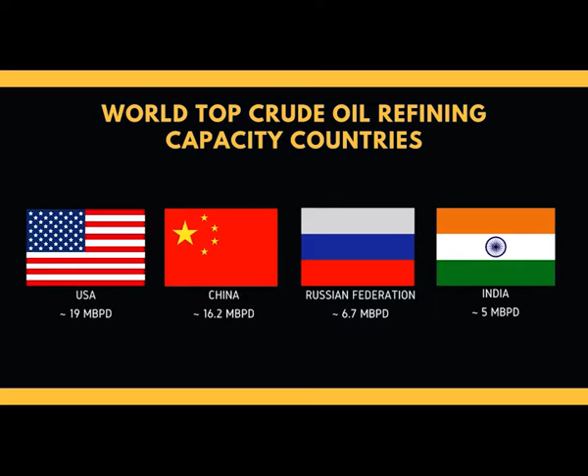So, in terms of crude oil refining capacity, India is in the 4th position, after USA, China and the Russian Federation. In USA, the capacity of refining is around 19 million barrels per day, while in China it is 16.2 million barrels per day. The Russian Federation processes 6.7 million barrels per day. In India, it is approximately 5 million barrels per day. So, that is where we rank in the refining capacity amongst the other countries.

Now, let us try to understand the history and evolution of petroleum refining in India. So, way back in the last part of the 19th century, oil was struck in Assam, and immediately the decision makers tried to set up a refinery in the nearby locality. So, the very first refinery in India was set up at Digboi, in Assam. Digboi refinery is known as the birthplace of the oil industry in India. So, that is where our oil and gas industry's history started.

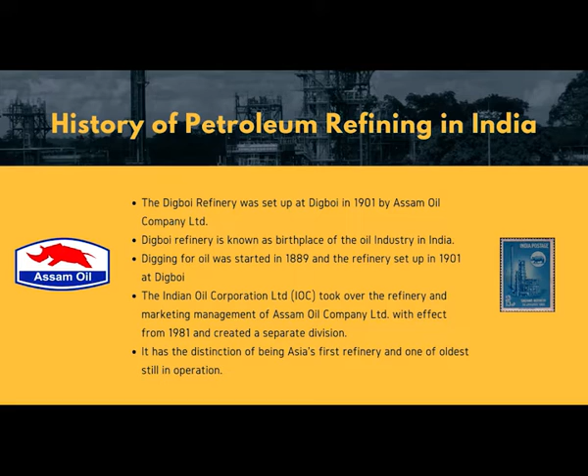Digging for oil started in 1889, and the refinery was set up almost in 1901. The Indian Oil Corporation took over this refinery, and it was known as Assam Oil Division, and finally it became part of Indian Oil Corporation. So, this refinery has the distinction of Asia's first refinery and one of the oldest still in operation. Even after 120 years, this refinery is running, and this is the unique distinction of the refinery at Digboi.

So, after Digboi refinery, for almost 53 years, there were no refineries constructed in our country. So, way back in 1954, Stanvac, a multinational company which was later known as ESSO, commissioned a 1.2 million metric tons per annum refinery at Trombay in Maharashtra. In 1955, Burma Shell commissioned its 1.7 million metric ton refinery in the same location, that is Trombay in Maharashtra.

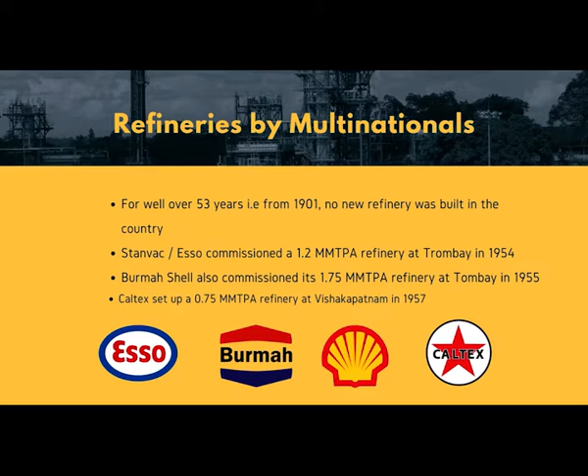On the other side, on the eastern coast, in the city of Visakhapatnam, Caltex set up a 0.75 million metric tons refinery in 1957. So, this is how multinationals started the refining industry after 1901, after a gap of 53 years. Later, due to several policy decisions, these multinational companies were taken over by Government of India.

In 1974, Hindustan Petroleum Corporation Limited, in short HPCL, came into being after the takeover and merger of erstwhile Esso Standard and Lube India Limited. Caltex Oil Refining India Limited, which was known as CORIL, was taken over by the Government of India in 1976 and subsequently merged with HPCL in 1977.

In 1976, Bharat Refineries Limited acquired complete ownership of Burma Shell's interest in India, including the largest refinery and the nationwide marketing organization. Bharat Refineries Limited was later named Bharat Petroleum Corporation Limited or BPCL. So, this is how these two major Indian petroleum organizations, namely HPCL and BPCL, emerged.

So, if you see the refinery organization in India, primarily there are 23 refineries which are managed by organizations such as Indian Oil Corporation Limited IOCL, Hindustan Petroleum Corporation Limited HPCL, Bharat Petroleum Corporation Limited BPCL, and ONGC, Oil and Natural Gas Corporation. All these are public sector undertakings. In the private sector, the refineries are managed by Reliance Industries Limited and Nayara Energy.

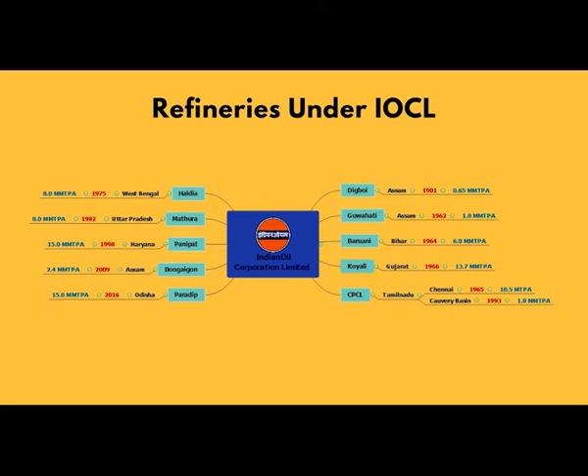Now let's try to understand the different kinds of refineries which are part of Indian Oil Corporation Limited. As I said earlier, Digboi refinery is the very first refinery, which was started in the state of Assam in 1901. This is the oldest refinery in the world which is running smoothly. And this is also called the Gangotri of the Indian hydrocarbon sector. Earlier it was owned and operated by Assam Oil Company Limited, which was a Burmah Oil company, and finally it came into the fold of Indian Oil Corporation Limited and known as Assam Oil Division. Now it is very much part of Indian Oil Corporation. So this is the oldest refinery in our country.

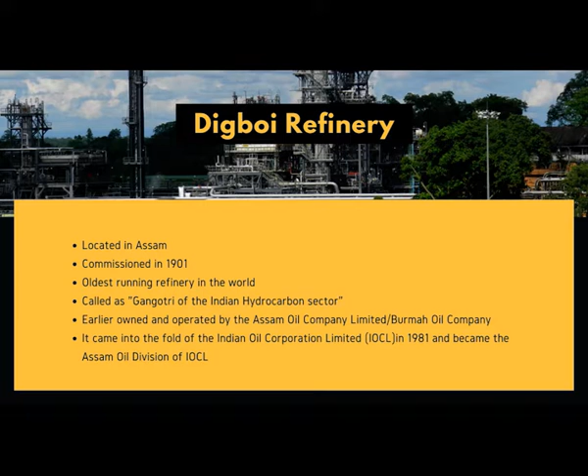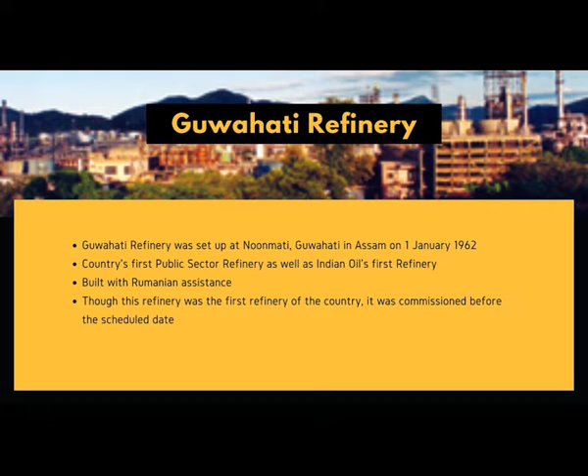The second refinery of Indian Oil Corporation is the Guwahati refinery. Guwahati refinery is also located in the state of Assam, and this was commissioned on Jan 1st, 1962. It is the country's first public sector refinery as well as Indian Oil's first refinery. So this refinery was constructed with the help of Romanian engineers. The Romanians traveled to India and they helped to construct the refinery, and of course our Indian engineers also got trained in Romania for constructing this refinery. Though the refinery was the very first refinery in our country, it was commissioned well before the scheduled date. So that's how the very first refinery has got its own distinction.

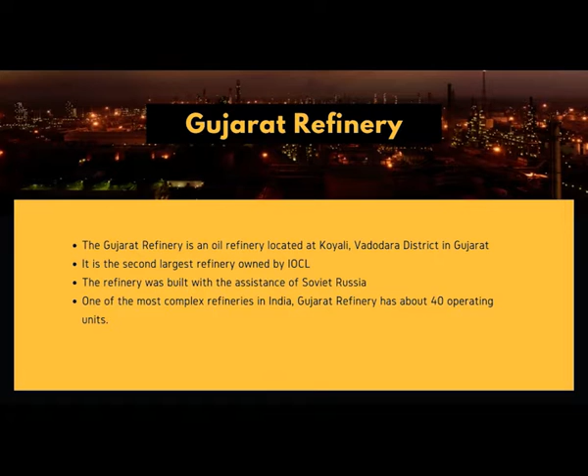Then we move on to Gujarat refinery, which is also known as Koyali refinery. So this refinery is located at Koyali, Vadodara district of Gujarat. This is the second largest refinery owned by Indian Oil Corporation Limited. The refinery was built with the assistance of Soviet Russia and is one of the most complex refineries in India. Gujarat refinery had around 40 different operating units, and this was the very first refinery to have hydrocracker technology. Hydrocracker technology is supposed to be one of the complex technologies, and Gujarat refinery was the very first to adopt this technology in the Indian refinery scenario.

Then the next refinery is Haldia refinery. Haldia refinery is located in West Bengal. This is the fourth refinery of Indian Oil Corporation Limited. It is one of the two refineries of Indian Oil Corporation Limited producing lube oil base stocks. Normally, refineries are classified as a fuel refinery or a lube refinery. All refineries cannot produce lube oil. Very few refineries would be designed and constructed in a manner so that lube oil can be produced. This is one such refinery which can produce lube base stocks. The fuel sector of the refinery was built with French collaboration, while the lube sector was constructed with the help of Romanian collaboration.

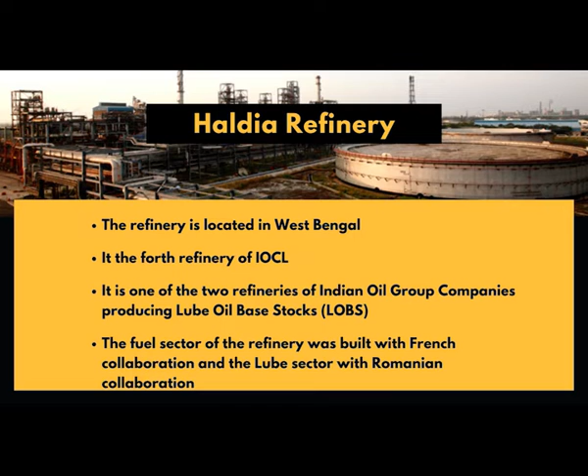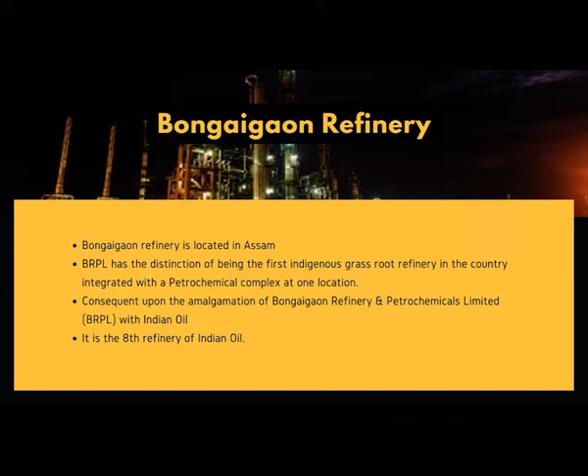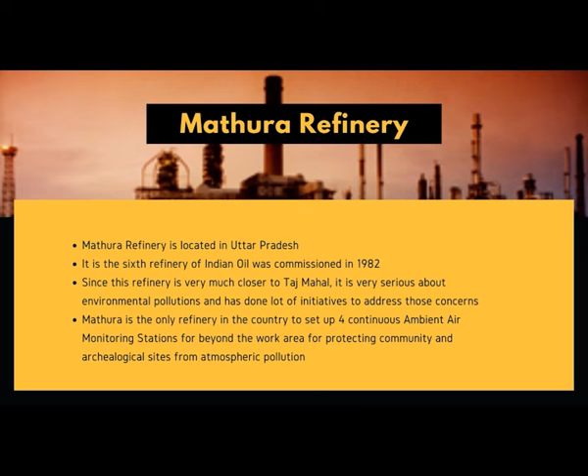Then comes the Mathura refinery. Mathura refinery is located in Uttar Pradesh, very close to the monumental heritage structure Taj Mahal. It is the 6th refinery of Indian Oil, commissioned in 1982. Since the refinery is very close to the Taj Mahal, it is very serious about environmental pollution and has done a lot of initiatives to address the concerns related to environmental pollution. Mathura refinery is the only refinery in the country to set up 4 continuous ambient air monitoring stations far beyond the work area for protecting the community and archaeological sites from atmospheric pollution. This is one refinery where a lot of new technologies have been brought in for the first time.

Then comes the Panipat refinery. Panipat refinery is located in the state of Haryana. It was set up in the year 1998.

Panipat refinery is the 7th refinery belonging to Indian Oil Corporation Limited. Then Paradip refinery. Paradip refinery is the 11th refinery being set up by Indian Oil Corporation in the state of Odisha. Now we move on to Chennai Petroleum Corporation Limited.

Chennai Petroleum Corporation was erstwhile known as Madras Refineries Limited, MRL, which was a standalone refinery some time back, and later it was acquired by Indian Oil Corporation Limited. Madras Refineries, or Chennai Petroleum Corporation Limited, was formed as a joint venture in 1965 between the Government of India, Amoco, an American oil company, and the National Iranian Oil Company, NIOC.

CPCL today has got 2 locations. One location is in Manali, Chennai, where it has got 3 refineries, and CPCL has also got a mini refinery at Nagapattinam. Chennai Petroleum Corporation was the pioneer in implementing a lot of new age technologies.

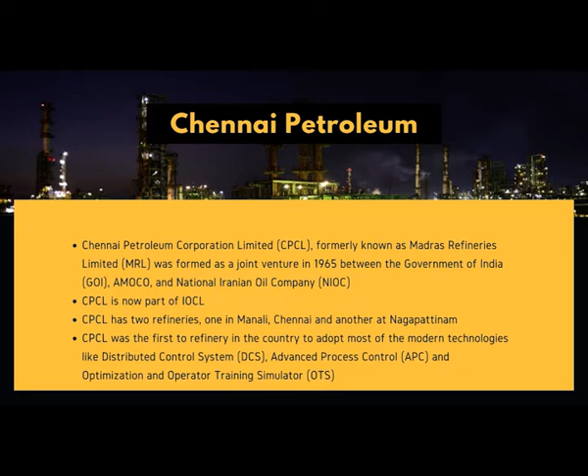It was the very first refinery to adopt a distributed control system, that is the microprocessor based control room, then advanced process control and optimization, as well as an operator training simulator. So that is how Chennai Petroleum Corporation has got the unique distinction of being the forerunner in adopting new technologies. Now we move on to Bharat Petroleum Corporation Limited, which is known as BPCL.

BPCL has got 4 refineries, one in Mumbai, one in Kochi, the third one is in Bina in Madhya Pradesh, and finally Numaligarh in Assam. The Mumbai refinery came on stream in 1955 under the ownership of Burma Shell Refineries Limited.

Following the government's policy of acquiring the multinational companies, Burma Shell was taken over by the Government of India and it was renamed as Bharat Refineries Limited in 1976. In 1977, the company was given its permanent name Bharat Petroleum Corporation Limited.

Bharat Petroleum Corporation has got presence in the entire downstream, that is refining as well as the marketing of petroleum products. Mumbai refinery has processed 93 different types of crude oil in the 5 decades of its operations, making it one of the most flexible refineries in the country. The next refinery that is part of Bharat Petroleum Corporation is the Kochi refinery.

Kochi refinery was earlier known as Cochin Refineries Limited, and Cochin Refineries Limited was established as a joint venture in collaboration with Phillips Petroleum Corporation, which was an American company, and the Government of India. It was later acquired by Bharat Petroleum Corporation in 2006. Now Cochin Refineries is known as Kochi Refinery.

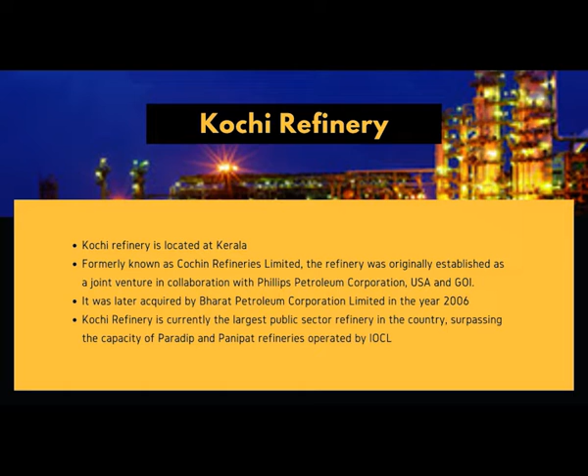Kochi Refinery is currently the largest public sector refinery in the country, surpassing the capacity of Paradip and Panipat refineries of Indian Oil Corporation Limited. Then we move on. This refinery, Bharat Oman Refinery, is a joint venture refinery. Bharat Oman Refinery is located in a place known as Bina in Madhya Pradesh. It was founded in the year 2011.

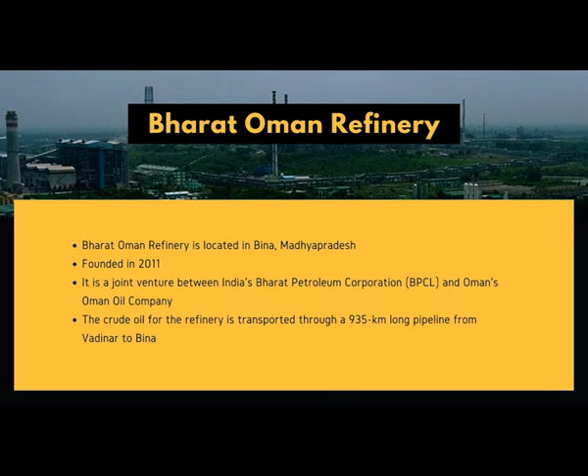It is a joint venture between India's Bharat Petroleum Corporation (BPCL) and Oman's Oman Oil Company. The crude oil for the refinery is transported through a 935 km long pipeline from Vadinar in Gujarat to Bina in Madhya Pradesh. The fourth refinery, which is part of BPCL, is known as Numaligarh Refinery. This is located in Numaligarh in Assam.

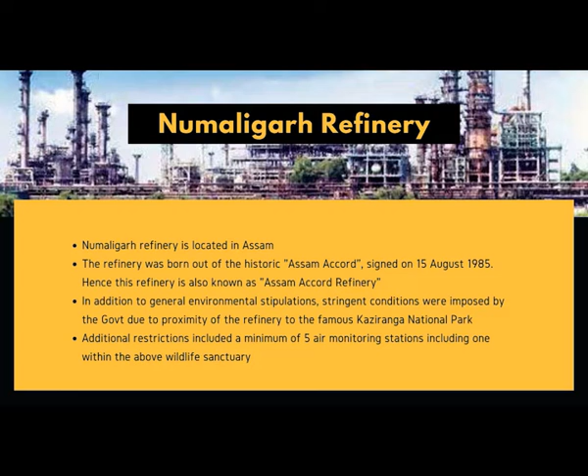The refinery was born out of the historic Assam Accord signed in 1985. Hence, this refinery is also known as the Assam Accord Refinery. This refinery is located close to the Kaziranga National Park. In addition to the general environmental stipulations, stringent conditions were imposed by the government due to the proximity of the refinery to the famous Kaziranga National Park.

So this refinery has paid enough attention to take care of the environmental aspects. Additional restrictions included a minimum of 5 air monitoring stations, including one within the wildlife sanctuary. Now let's move on to discuss the refineries under the umbrella of HPCL, that is Hindustan Petroleum Corporation Limited.

HPCL has got 3 refineries, one in Mumbai, the next one is in Visakhapatnam, the third one is Bathinda. Mumbai refinery, as we discussed earlier, was a refinery that was taken over from a multinational organization by the Government of India. This is located in Mumbai, Maharashtra.

This Mumbai refinery was commissioned by Standard Oil (SO) in 1954. In 1974, the Government of India took over the operation of SO in India and created Hindustan Petroleum Corporation Limited as a public sector enterprise.

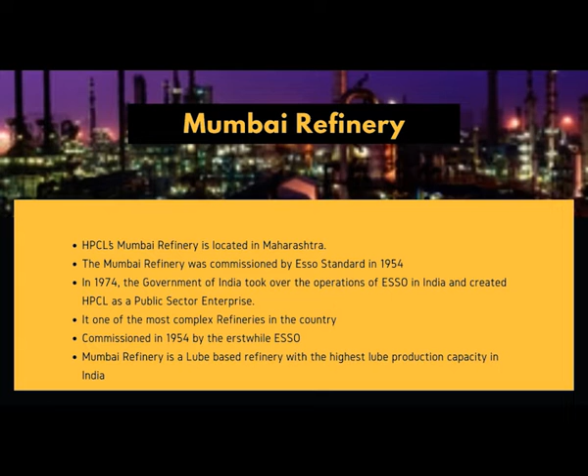It is one of the most complex refineries in the country. So this Mumbai refinery of HPCL is one of the lube-based refineries with the highest lube production capacity in India. The second refinery under the umbrella of HPCL is the Vizag refinery.

The Visakhapatnam refinery was commissioned in 1956 as Caltex Oil Refining India Limited, CORIL, in Andhra Pradesh. This was the first refinery on the east coast of India and the first major industry in Visakhapatnam. Finally, in 1978, CORIL was taken over by the Government of India, and finally this refinery was merged under HPCL.

The third refinery under the umbrella of HPCL is the HMEL Bathinda refinery. This is a refinery located in Punjab. It is actually a joint venture refinery, a joint venture between HPCL Limited and Mittal Energy Investments Limited. This refinery became operational in the year 2012. This refinery is also known as Guru Gobind Singh Refinery, GGSR.

Now we are going to discuss the refineries under ONGC, Oil and Natural Gas Corporation Limited. As many of you know, ONGC is an upstream company that is primarily into exploration and production. Later, ONGC also started focusing on the downstream, and right now it is in the refining business. Let's try to understand the refineries under ONGC.

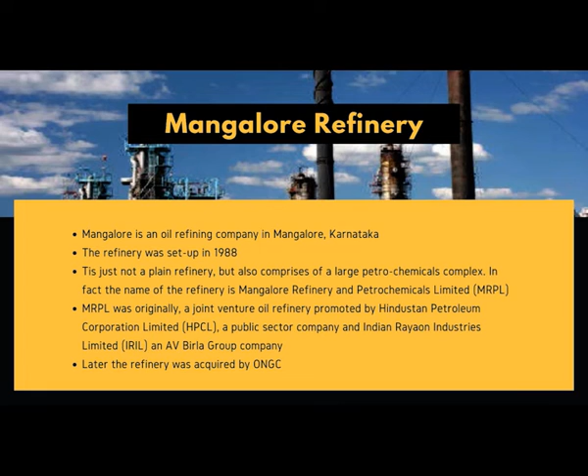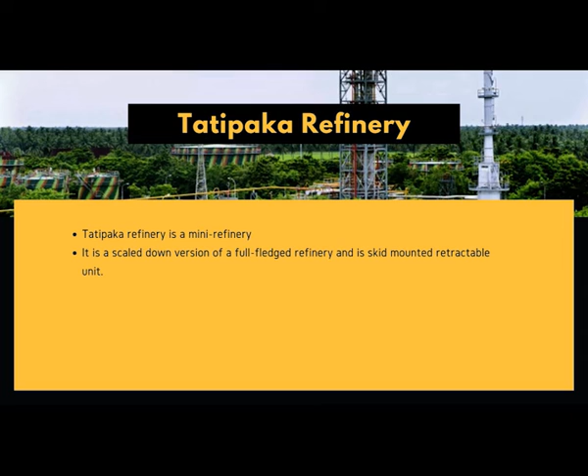Now the refineries we have so far discussed were part of public sector undertakings where the Government of India was the major stakeholder. Now we move on to discuss the refineries under the private sector. So when we talk about the private sector's presence in the refining business, the first group that comes into the picture is Reliance Industries Limited. So Reliance has got presence in the oil and gas business. Earlier they were into the petrochemical business. So as a strategy of backward integration, they tried to get into the refining business, and because of this reason, now they own 2 refineries in Jamnagar.

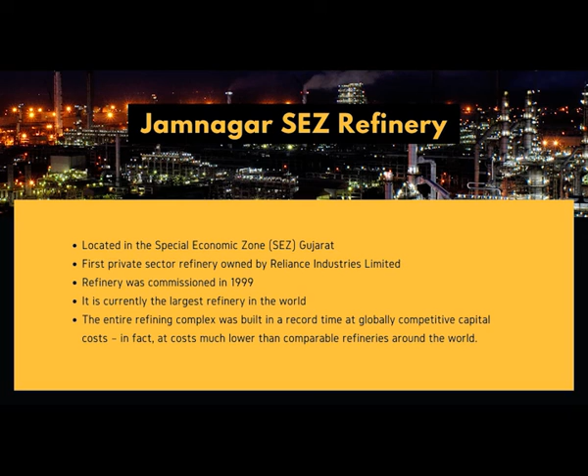So the first refinery is located in the Special Economic Zone, Jamnagar, Gujarat. The first private sector refinery owned by Reliance Industries Limited. This was commissioned in 1999. It is the largest refinery complex in the world. The entire refinery complex was built in record time at a globally competitive capital cost. In fact, at a cost much lower than comparable refineries around the world. And this refinery is also one of the most complex refineries in the world.

Then the next private sector refinery is part of Nayara Energy. Let's try to understand more about Nayara Energy. Nayara Energy's refinery is located in Vadinar in Gujarat. Earlier this refinery was part of Essar Oil Limited. Currently it was taken over by multinationals. Currently the major stakeholders are Rosneft, a Russian energy company, and Trafigura, a Singaporean trading company.

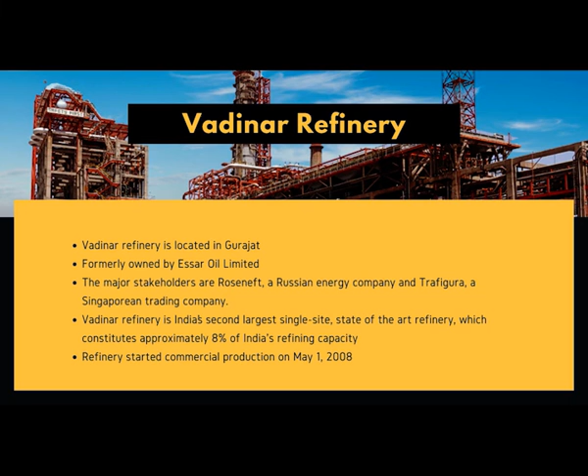Vadinar refinery is India's second largest single site state-of-the-art refinery, which constitutes approximately 8% of India's refining capacity. And this refinery started producing petroleum products in the year 2008. India's refining capacity has increased to 248.9 million metric tons at present, comprising 23 refineries: 18 under public sector, 3 under private sector, and 2 in joint sector. The capacity utilization of the refineries in India was 106.6% in 2016-17. Now it has increased to 107.7% in the year 2017-18.

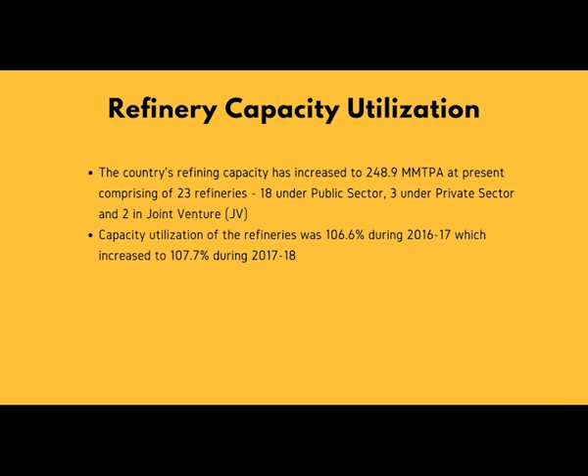So way forward, India plans to almost double its refining capacity. Currently it's approximately 250 million metric tons per annum. In the next 10 years, the Government of India has planned to increase the capacity to around 450 to 500 million metric tons. This is primarily to take care of the future energy needs of the country. The capacity additions will happen in private as well as government sectors, either through brownfield or greenfield refineries. The major refinery is expected to be constructed in Maharashtra in collaboration with the Middle East companies, Saudi Aramco and Abu Dhabi National Oil Company.

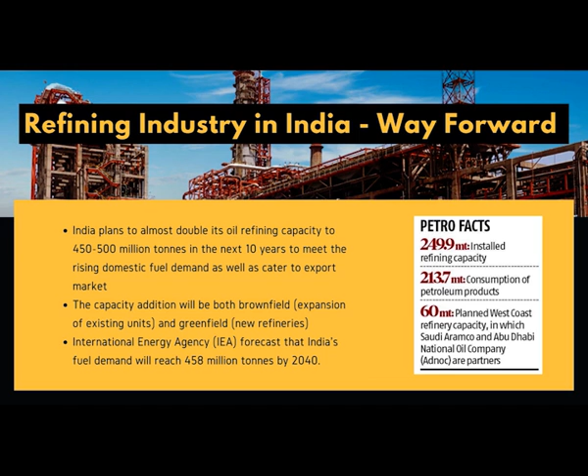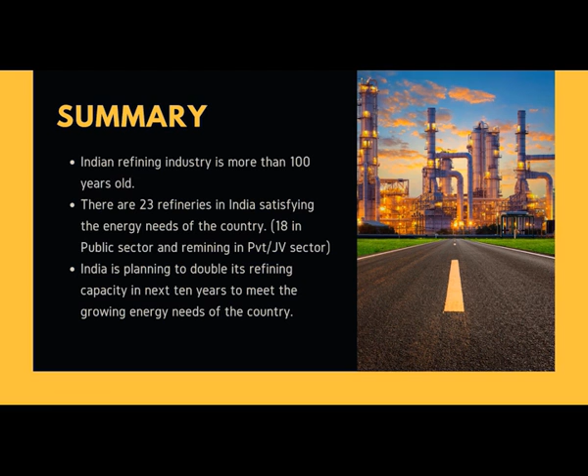So in this episode, we tried to understand more about the Indian refining industry. So in summary, the Indian refining industry is more than 100 years old, and there are 23 refineries catering to the energy needs of the country, and India is planning to double its refining capacity in the next 10 years. This is the summary of today's discussion.